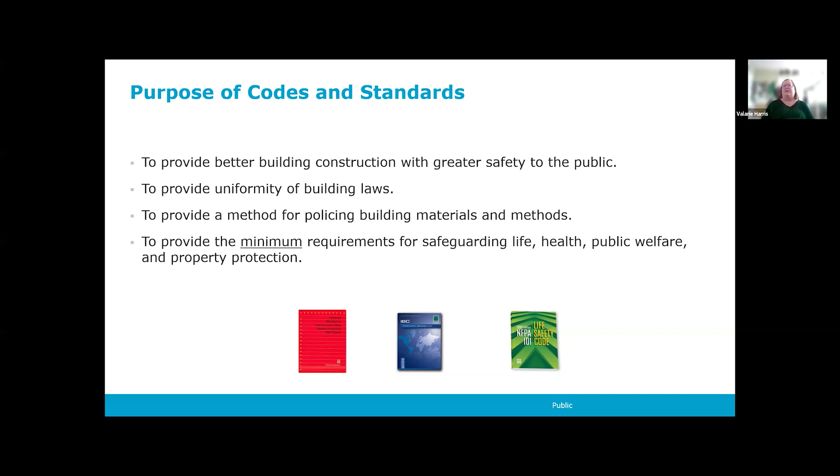There are several codes that affect accessibility. The reason for the codes are to provide better building construction with greater safety to the public, to provide uniformity of building laws, and to provide a method for policing the building materials and methods. It is important to remember that the code is the minimum requirement for safeguarding life, health, public welfare, and property protection. Sometimes it's a pretty low bar, and there are a lot of options that provide greater usability, greater longevity, things like that. So just being code compliant is not necessarily the only criteria you want to think about.

Most of the country uses the International Building Code, IBC, which in accessibility is based around the Department of Justice guidelines and has been codified into the ANSI Standard A117.1. California is kind of the same, but kind of not. This program is designed for a national audience, so we've gone through and put in the California code information as kind of an add-on. It may not be the most graphically exciting way, but sometimes I had to squish to get things in there, so that's why it might not be as graphically pleasing as our marketing department would like.

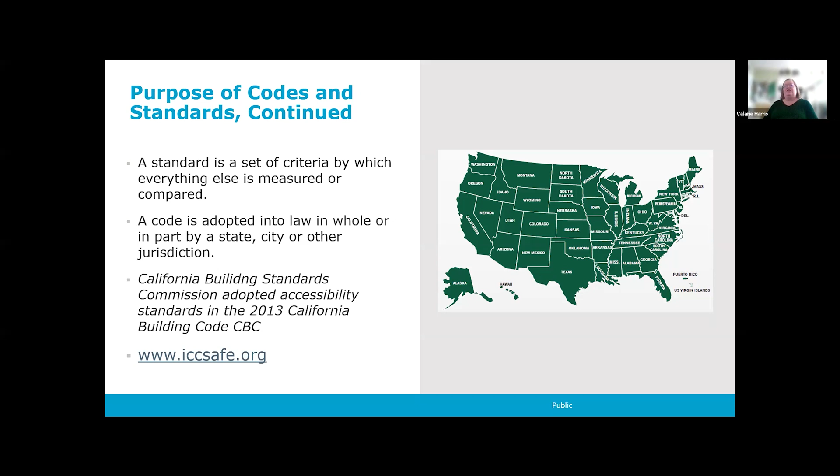A code is adopted into law in whole or in part by a state, city, or other jurisdiction. I have a typo there. California Building Standards Commission adopted the accessibility standards in the 2013 California Building Code, and the different entities like OSHPD, which is now HCAI, and DSA have made some modifications to it as well.

Door hardware is always a balance between life safety and security, and then I think it's a pyramid where we add in accessibility to that as well. So we're always, and those are kind of opposing things, that little teeter-totter there.

Accessibility comes from the American with Disabilities Act. It's an application and there are administrative aspects to it. It covers many more things than doors and hardware, but we'll talk mostly about doors, doorways, and door hardware. And a very important part of that, which is often confusing, is maneuvering clearances, so we'll talk about that quite a bit too. I'm not going to read all the charts and numbers, but we'll talk about what it is and why it matters, and then a little bit about the requirements on door hardware.

The American with Disabilities Act is a civil rights law passed in 1990. It's regulated by the Department of Justice, and Title III applies to public buildings. So what we're talking about here today is mostly found in Title III.

The standard by the International Code Council and ANSI, the American National Standards Institute, is A117.1. The current version is 2017, called Accessible and Usable Buildings and Facilities. It has door and hardware requirements that link up with the IBC more directly than with the CBC, so we'll talk about what some of those differences are.

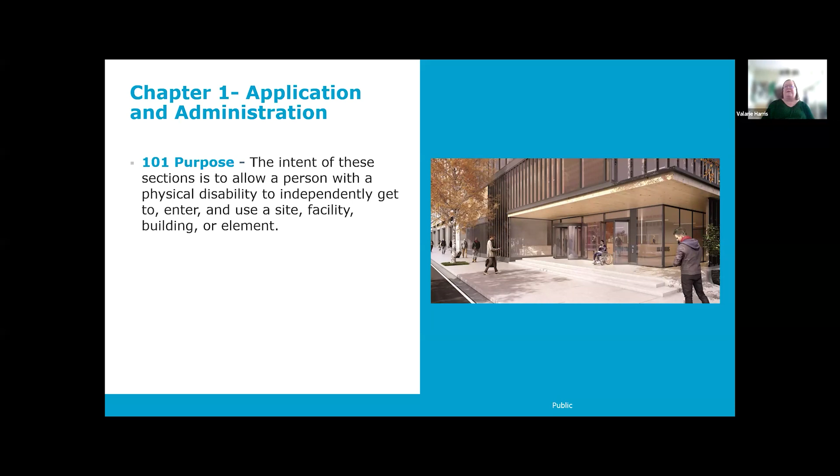The thing that affects doors most often is a physical limitation. My mother had Parkinson's for many years, and getting through doors that did not have good accessibility always ended with me shutting the door, or her getting whacked with the door, which was a bigger problem than me. So there's a lot going on that you have to be aware of. Having traveled a little in other countries, our accessibility here is so much better, and I really missed it when it wasn't here or when I was over there.

Chapter 4 is the main chapter having to do with accessibility, and a little bit about numbering: 11B uses the same numbers as the ANSI standard, while 11A has its own numbering system. So when we get there and talk about differences, I'll have both the 11A and 11B numbering. I probably should have put that on this slide, but I didn't.

The basic thing is that accessible routes shall comply with section 402. An accessible route must have a walking surface with a slope of not steeper than 1 in 20. If it has doors and doorways, they need to be accessible. If there are ramps or curb ramps, there are specific requirements for those, and elevators and platform lifts are all part of an accessible route. So sometimes there are things we can do designing a building which don't allow us to make that an accessible route—we need to be aware of that difference.

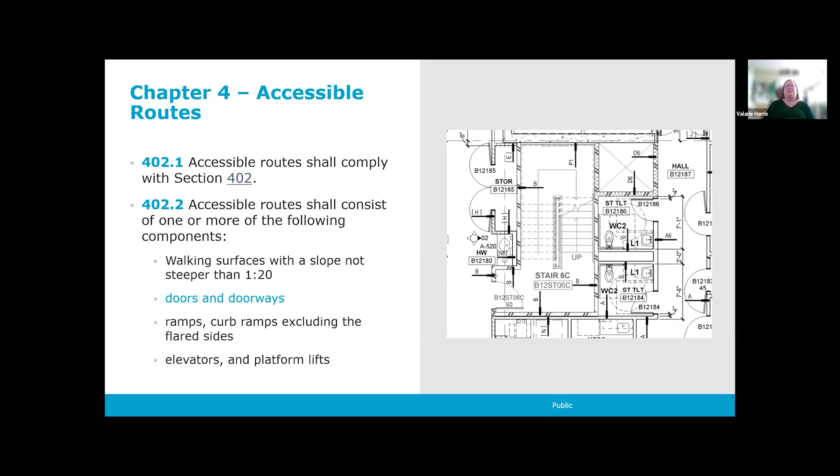And there we go. So there are manual doors and doorways and manual gates, including ticket gates, and they all have to comply with section 404.2. Here's where it shows how that numbering is different. 11B takes the same numbering system, so it's 11B-404.2, whereas in the residential 11A numbering system for CBC, there is its own number, 1126A.1. Generally they say essentially the same things, but we'll talk about them when they're a little different.

It applies to double leaf doors and gates, and on a double leaf, at least one of the leaves must comply with 404.2.2 and 2.3, and 1126A.1. Don't worry about the numbering, we'll just get there and talk about what it takes to comply with those sections.

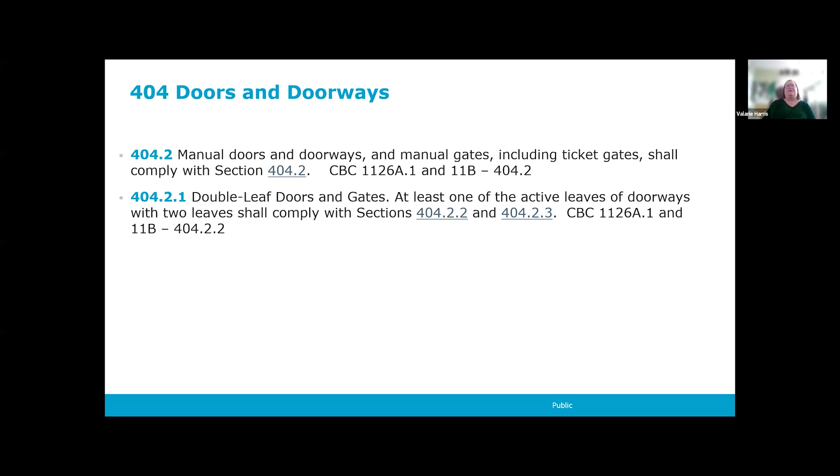And this is it, so this is where it gets a little messy. Sorry about that. So I pulled out what 1126A.1, the residential section, says, and it is a little less extensive than the 11B section, but this will get us started on this discussion. Doorways can be no less than 36 inches wide, not less than 80 inches tall.

And when the door is open 90 degrees, it cannot be less than 32 inches clear to get through that doorway. I have a picture later that shows how that's measured, but that 32 inches clear is what's very important. So if your wall geometry is a little off and you're at 31 and 11/16, that's not 32 inches clear, so that does not comply.

And I have seen where walls have to be moved in order to accommodate that.

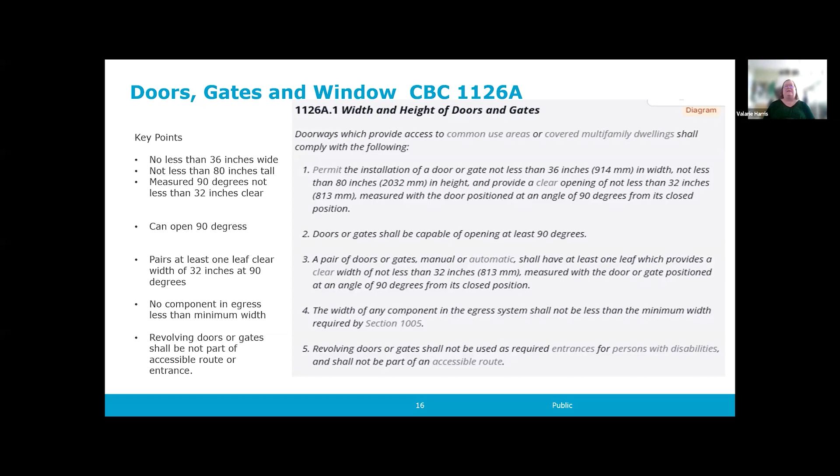Well, this is a big problem because a lot of door levers are like 3 5/8. So you get 2 levers, you get a 1.75 inches thick door, you get a rose, maybe you have a hold open back there, and all of a sudden 7 inches gets pretty tricky. So if you're going into a hospital that had 8-foot corridors, but maybe they're a little wonky there where your door needs to go, and now all of a sudden you don't get your 8-foot corridor.

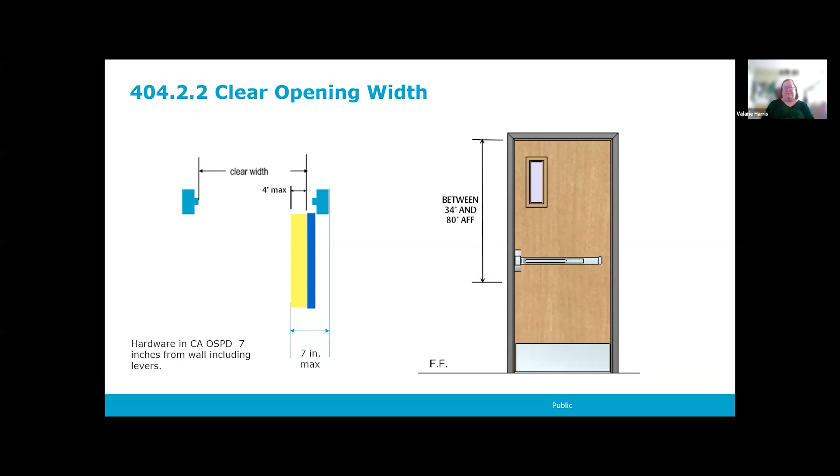Here's a picture of how that clear width is measured. Usually the inspector takes a tape and measures it between the edge of the door and the stop.

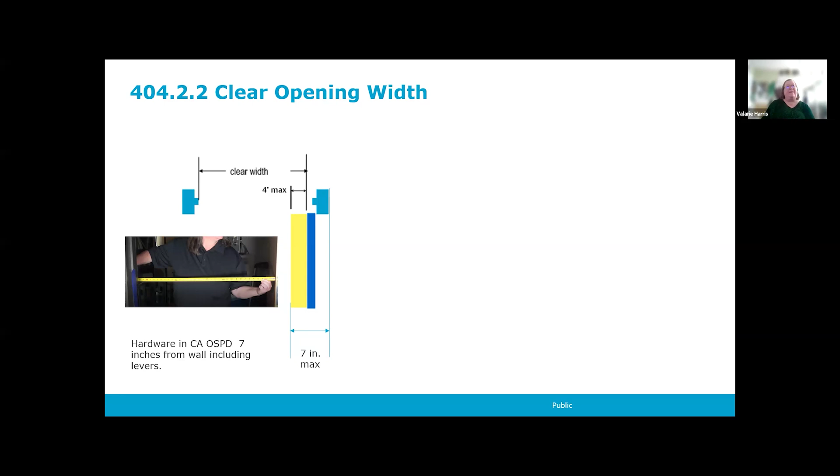So this is the fun and lovely part of accessible doors, maneuvering clearances. These are important so that if someone is using a walker or a wheelchair and doesn't have a lot of upper body strength, they have room to be next to the door, open the door without hitting their wheelchair or walker, and then get through the door.

It matters whether you're approaching the door from the front, and there are diagrams coming up that show this. If you're coming from the hinge side and the door pushes away from you or pulls towards you, or if you're coming from the latch side and the door pushes or pulls away from you, you can look at these maneuvering clearances.

You see they range from 0 inches to 60 inches, so that can greatly affect the design that you have. And those have to be clear—you really shouldn't mount a trash can on the wall in that space.

It also changes if there is a closer on the door, because the closer makes the door harder to open. So they require additional clearances often if there's a closer.

So there is a way around that: if you need the door to close because it's maybe access controlled, or it's a restroom door or something like that, you can always put an automatic opener, and there are less expensive automatic operators designed for this kind of issue. I would not put the cheap, inexpensive auto operator on your main front door, but if you have a public restroom, they're really good for that.

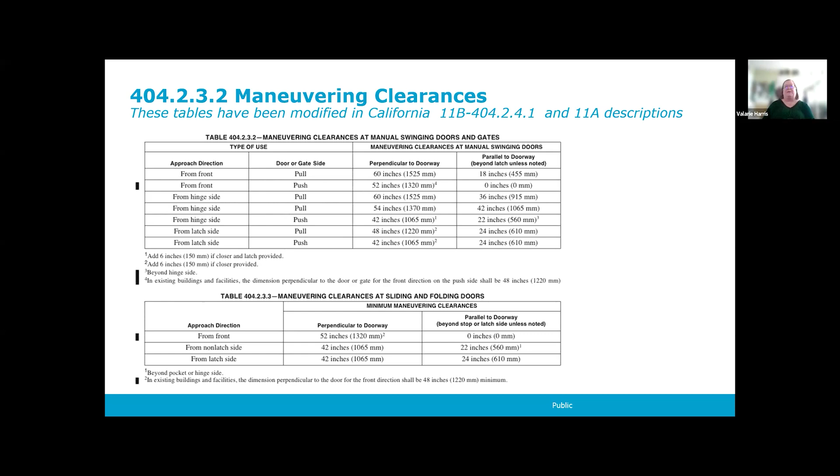So here's some of those pictures I was talking about, which for me makes it easier to understand. These first ones are talking about if you're going to have to roll up to this door, pull it open, back up, and get the door open—you're going to need space, like 60 inches minimum.

You also need a different amount of clearance at exterior doors and interior doors. Not sure why, but you just do. And if you had an automatic door here, you would need a high-low operator, or a high-low actuator, so you would need room for that 36-inch bar.

You can get by with less if you're pushing the door open—you don't have to be able to back up to get the door past your wheelchair, so you need much less space. However, if your dominant hand or your disabled hand is on this side, you need to be able to reach the door and push it open. That's why you need minimum clearance next to the door.

And then if you're approaching from the sides, it makes a difference as well. We won't go through all of these numbers, but just note that there are a lot of different shapes. So if you're in doubt, I'd recommend you go to the code and look up what these requirements are for your specific opening in question.

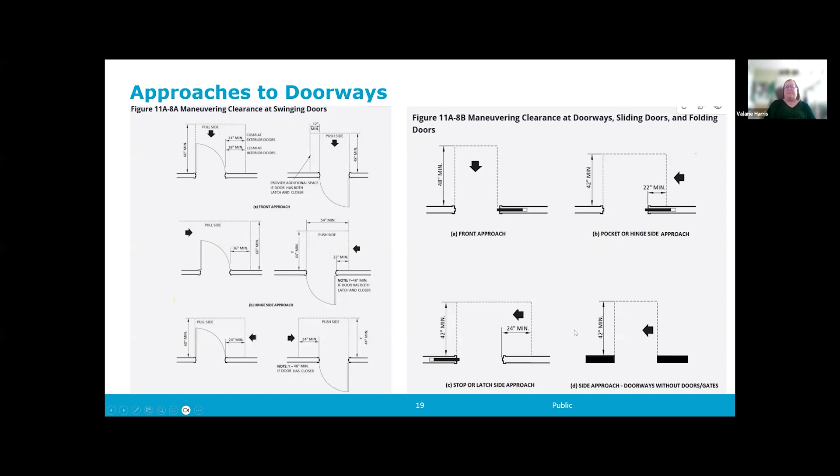So watch that. And if you're coming from the latch side, which in a sliding door means where the door stops, you need a larger clearance. This is what I was talking about with that 1960s architecture.

I once worked on a school project where every door had a piece of structural material. It was a masonry building with decorative masonry on either side of the door, all 200-ish doors. So it created quite a challenge. I think we ended up moving the doors to somewhere else in the wall, but I wasn't necessarily involved in that—I was just looking at it as a problem.

So these kinds of doors require extra space, and you still have to get your 32 inches clear minimum. If the door's recessed part is on the side away from the swing, it's much easier than if it's on the side with the swing.

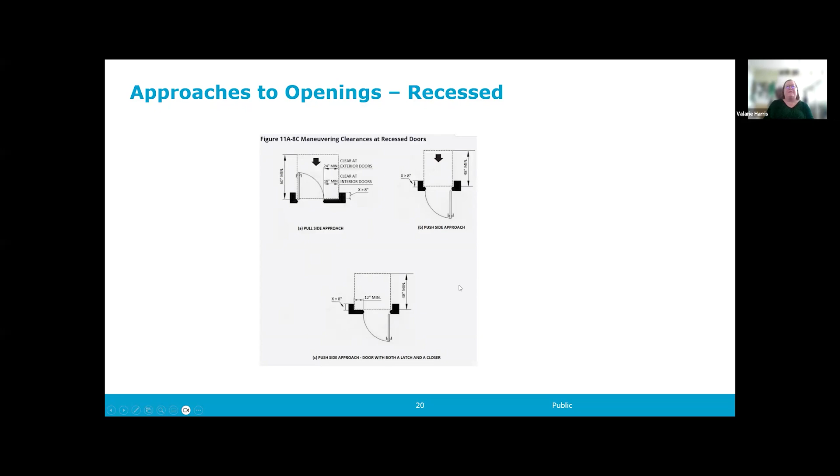If you have vestibules, there are rules for that too—how far apart your doors can be, how much room you need between them, and what your minimum clearances are. It depends on whether the doors both swing in the same direction. If the doors both open out, you have different requirements. If your doors are on adjacent walls, you need additional maneuvering space, and where you measure the 48 inches can be different.

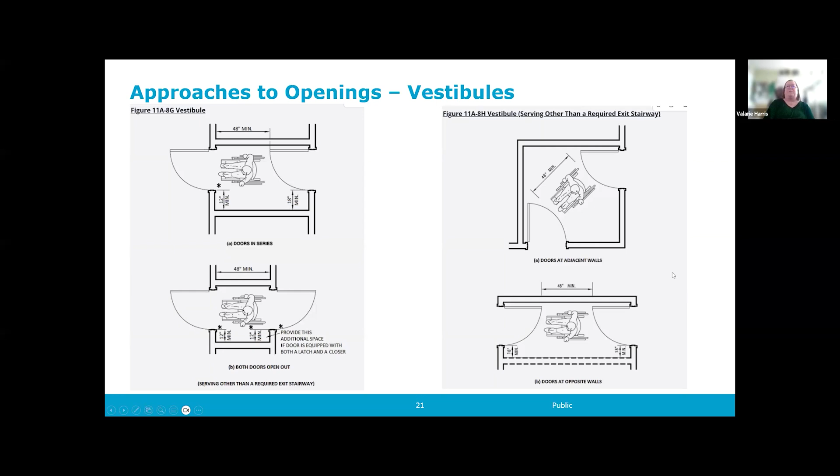And if you have doors on opposite walls, you still have to have your 48 inches between the doors. So now you're getting 36 inches plus 48 inches plus 36 inches—it becomes a pretty big vestibule.

Besides all those numbers and measuring and what has to be clear, there are other requirements too. The floor landing has to be clear and level. You're measuring at right angles to the closed door, and you're measuring the full width of the doorway. There are different clearances on the latch and hinge side, and there might be different clearances based on whether there's a closer on the door.

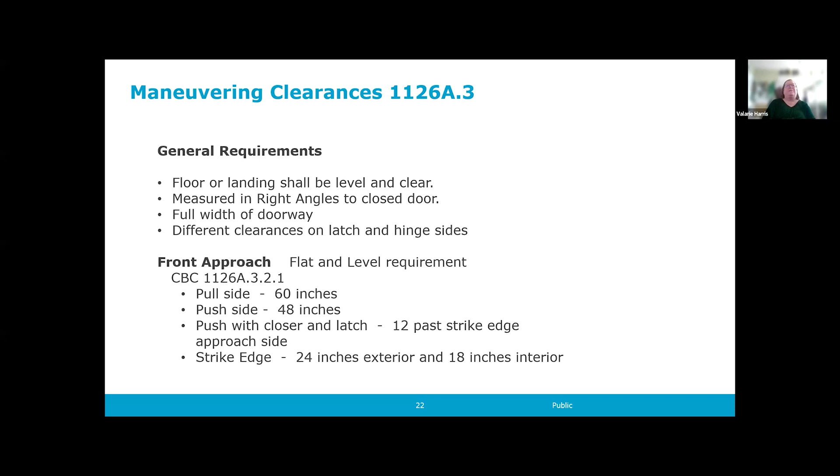We kind of went through this twice already, so I think I'll skip that.

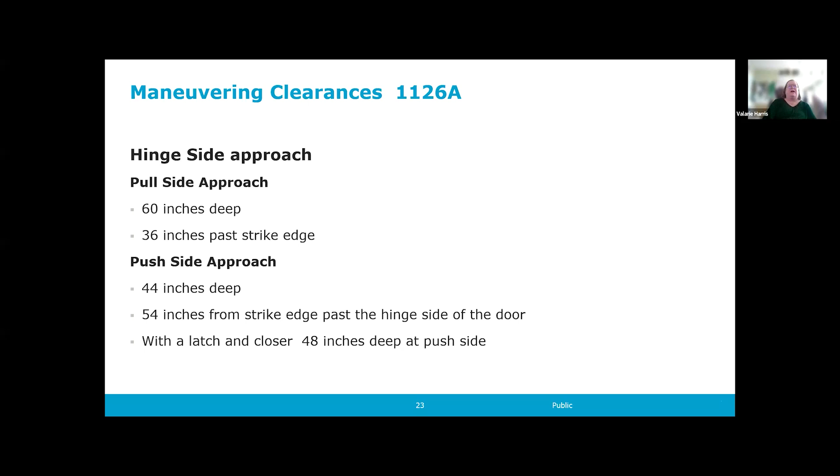These are the general numbers for a front approach, a side approach on the pull side, and a push side approach. And if you're on the latch side, it changes as well.

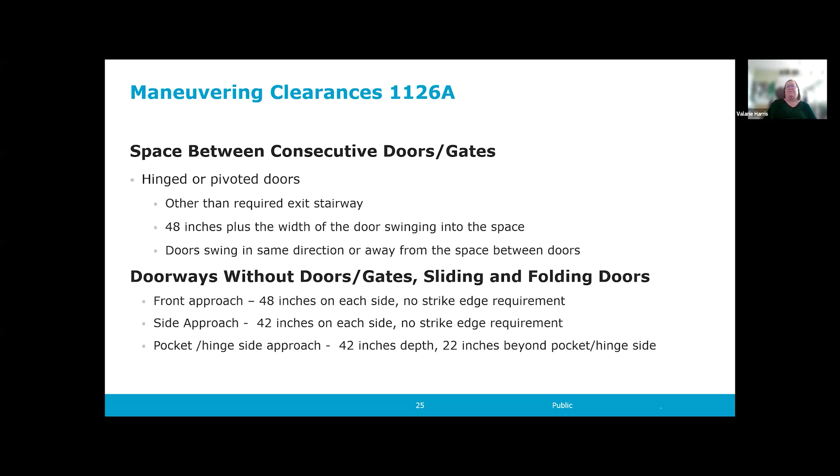A side approach is only 42 inches. And if you have a pocket or hinge side approach on a sliding door, it's 42 inches deep. If you have a pocket where you're insetting the door into the wall, like an alcove, you need about 22 inches beyond the pocket on the hinge side.

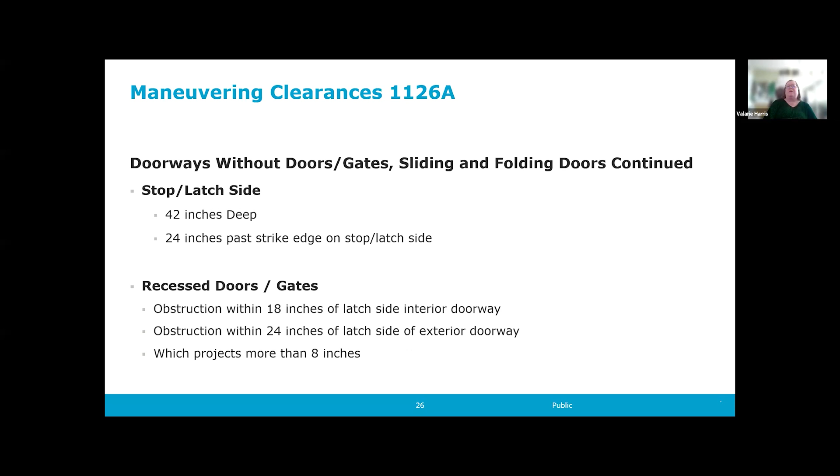And then recessed doors come into play when something projects more than 8 inches. So the next point that causes a lot of consternation is thresholds.

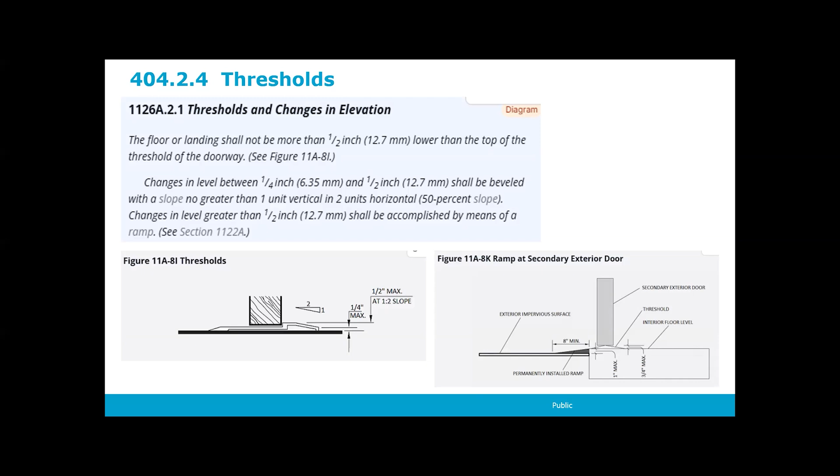Thank you. So we've done the most horrible part of this presentation, all those numbers and dimensions. And the key takeaway for that is just pay attention, because you don't want it to be the inspector who points it out to you that you're not meeting it. So the next subject is thresholds. Thresholds and changes in elevation.

So if you have a floor or landing, you can have an immediate bump up of 1/4 inch, and then you can have a 1 to 2 slope that does another 1/4 inch. So for a total of a 1/2 inch maximum at any accessible doorway. If you have a bigger gap that you need to make up, like the concrete is lower than a 1/2 inch from your floor, then you have to do a ramp. And so, let me look. So the ramp is in section 1122A or in 404.2.4 in 11B. And the slope of the ramp is the same as any other slope.

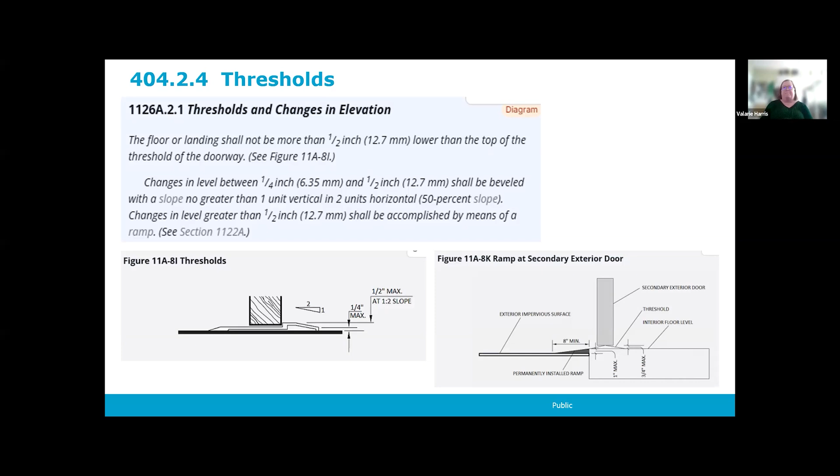So then we get to door hardware. So that's also in section 404. And in 11A, it's in 126A.5 and 10 1008 sections. So California code is a little different in several ways from the International Building Code. We require the hardware to be mounted between 30 and 44 inches. And in IBC, it says unless for security purposes.

However, there are access control products on the door where the top of the card reader is above 48 inches if you have the bottom of the block at 34. So some code officials don't mind that as long as you can get your card read between 34 and 48. And some do mind it. So you have to be careful with that.

And then pools can be, oh, I see I have a typo up here where it says 30 inches. Oh, in California, it's 30 inches to 44. And in the IBC, it's 34 to 48. So you can see how that can create kind of an issue sometimes with hardware that's designed to this standard. Pools have an exception where you can raise the self-latching but not locking pool hardware to a max of 54 inches. You also have to be able to use the hardware without grasping.

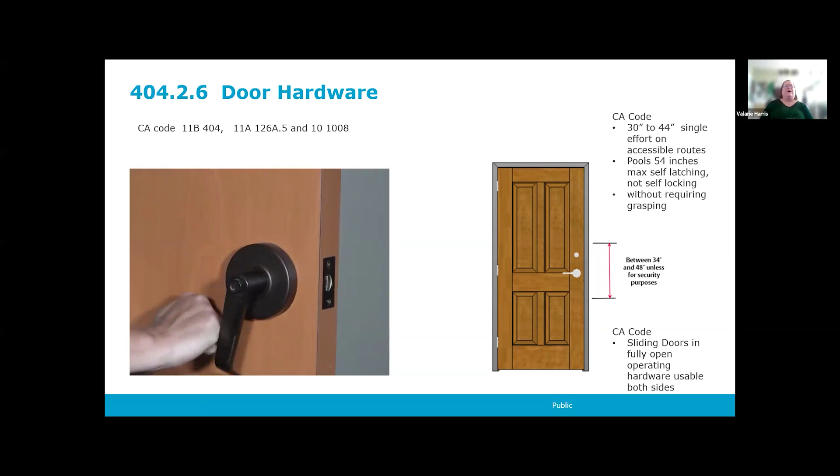So then hardware needs to be a lever with a return in California. In other areas, it does not have to have the return. And you can see they're demonstrating there how someone who has a neurological issue, one of the first things that go is their hands become kind of fist-like and they don't have the finger dexterity. So while most people can grab a lever with their hands, if you have that issue, when you have a return on the lever, it helps your hands stay on the lever.

And then it needs to be a push button to lock the door generally. Little teeny thumb turns aren't good. If you have like an occupancy indicator, there are larger thumb turns that can be done with the side of a fist, and those are acceptable. And in California code, they added that sliding doors must, in fully open positions, be able to operate the hardware on both sides. So that pretty much eliminates flush pulls that go back into the opening or go back behind the door.

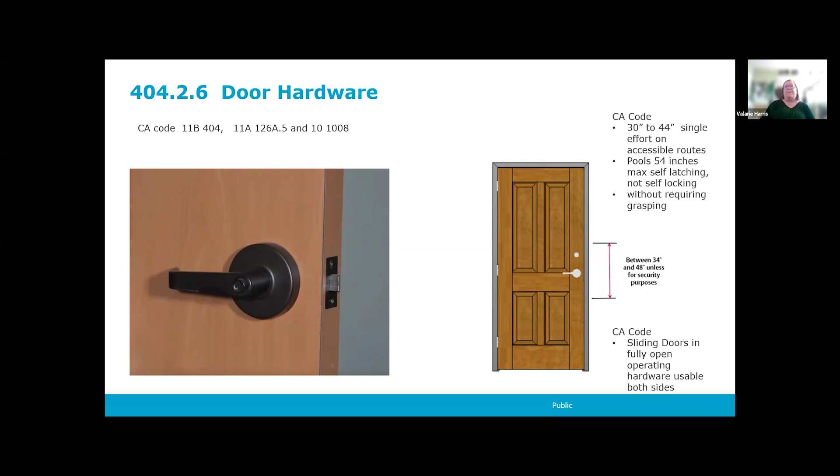Then door closers affect accessibility. So with a door closer, when the door is open 90 degrees, the time required for the door to move to an open position of 12 degrees is 5 seconds minimum. This is a fire life safety requirement, so that in case of a fire, somebody goes through and the door closes again.

In a spring hinge, which is different than a closer, you go from 70 degrees, it has to close in 1.5 seconds minimum. So that's pretty quick, and people can get their fingers shut in that door. I know multifamily uses spring hinges a lot. A problem with spring hinges is they need pretty regular adjustment so that they don't either snap the door closed and hurt people or close slower than the 1.5 seconds.

Stack pressures, either from wind outside or stack pressures within a stairwell. There are cam action closers, which make it easier to get the door to close under the stack pressure and the wind, basically, and to make sure it closes as a fire rated door. So what a cam action closer does is it makes it easier to open the door. So that makes it easier to meet the 5 pound operating and opening force requirements,

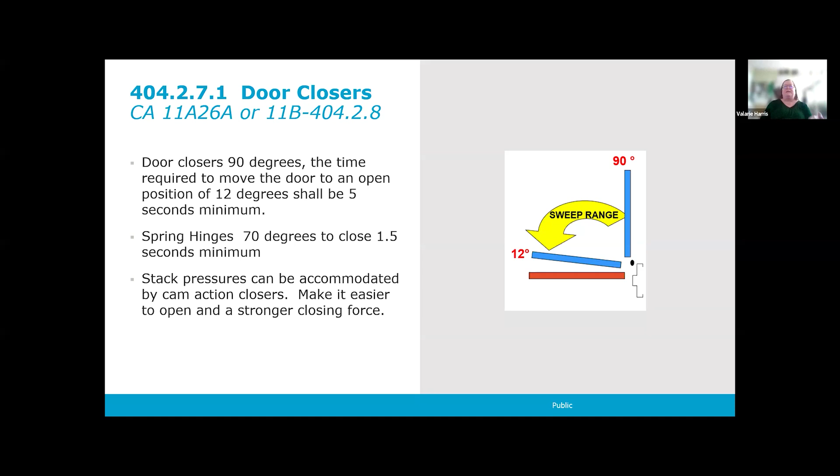but it is stronger to close. So it will close all the way. It produces more force in the closing action than it does in the opening action. So it makes it both easier to open for accessibility and easier to set it so that it'll close every time for fire life safety.

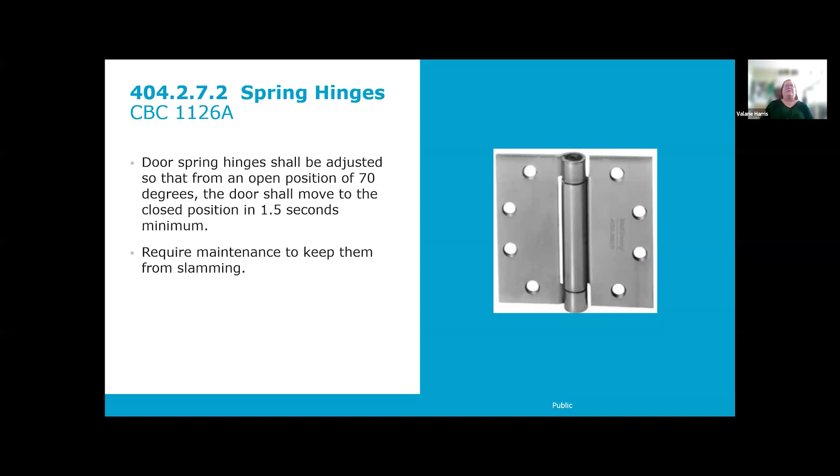And this is what spring hinges look like. And they require maintenance. I doubled up on this slide, sorry. And this is what a closer has, so much adjustability to it. All of these different things are ways it can be adjusted, and major component parts, so that it can be adjusted to meet the opening force requirements.

So an interior hinged door, California A and B require 5 pounds maximum. Sliding or folding doors, 5 pounds maximum. DSA requires 5 pounds maximum on operating and opening forces. So an operating force is like the force it takes to push an exit device bar down or to turn a lever, or however you are operating that door hardware.

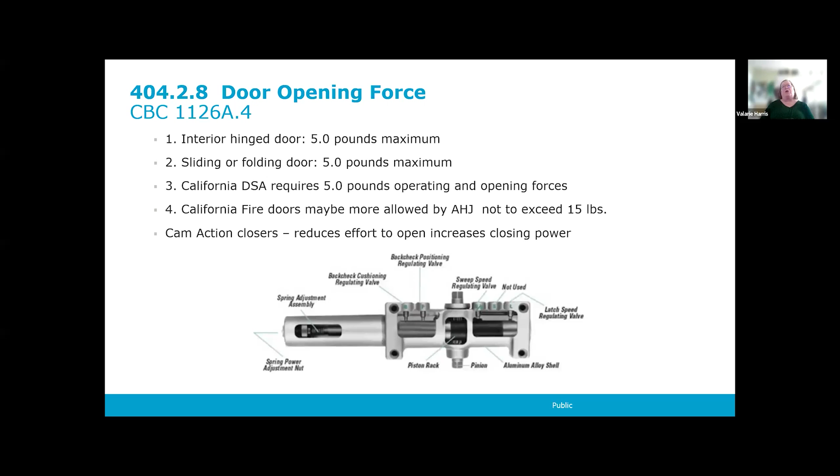And then California fire doors may be allowed by the authority having jurisdiction, usually the fire marshal, to have a little more than 5 pounds maximum, though DSA is the authority having jurisdiction for schools, and they are usually reluctant to make it more than 5 pounds, but other fire authorities can make it more, not to exceed 15 pounds. And then we already talked about cam action closers.

So door surfaces are also regulated. So the bottom 10 inches of the door on all doors, except all glass doors, and a glass door without vertical stiles is what has the exception. That can have a smaller rail that is tapered. And so if you were in a wheelchair, it wouldn't be an impediment because your wheelchair feet could ride along that taper and not get caught.

But if you have the pull here on the push side of the door, it has to be above 10 inches. If your door can be pushed in both directions, they're both push sides of the door. So they both have to have 10 inches clear.

And on a door that has a kick plate, watch out for panhead screws. The manufacturers all provide panhead screws in the packaging with the kick plate, but most door hardware consultants specify countersunk screws in countersunk holes in the kick plate. If you have 30 panhead screws along the top, bottom, and edges of that kick plate, it is not clear. It can be an impediment. So a countersunk screw, of course, fits flush with the kick plate. And then the kick plates should be beveled and free of sharp edges. And they can be no more than 1/16 of an inch thick.

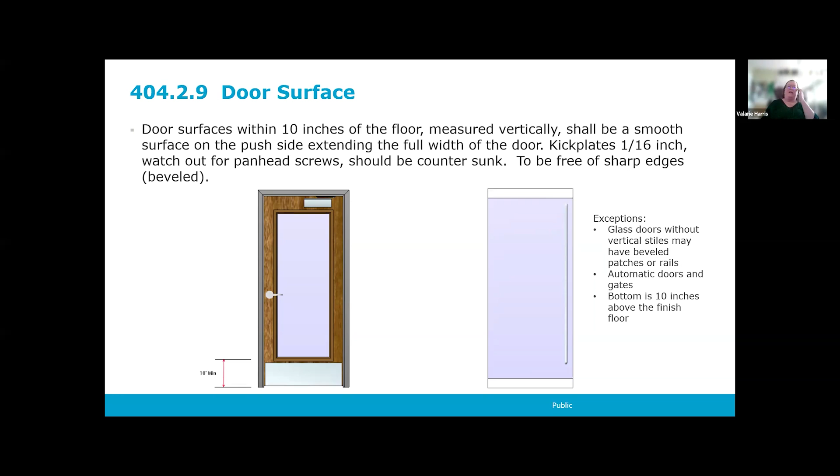Vision lights have some changes as well. The code requires you to either be able to see through the light to see if there's someone on the other side of the door that might be short in stature or in a wheelchair, or it has to be so high that you're not mentally counting on being able to see someone on the other side of the door, so you might be more careful.

So it's 43-inch maximum if you're going to have a light that goes partway down the door, and it's 66 inches or higher if you're going to have a light that's at the top of the door that most people can't see through.

And for door hardware, you want to allow 6 inches between the edge of the door and the edge of the frame around the light, or a side light, so that you can mount the hardware there. If it's less than 6 inches and it has to be 43 inches maximum from the floor, and you have to mount your hardware within 34 inches to 48 inches, you may have to buy a new door if you didn't allow for 6 inches.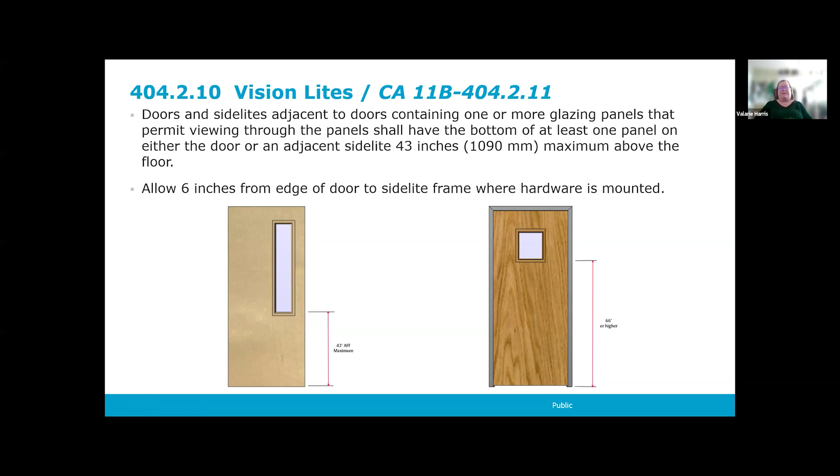Power operated or automatic doors, they have their own section, 404.3. There are 2 types of automatic doors, which confuses people. There's fully automatic doors, which comply with this BHMA standard, which is about 50 pages of test procedures.

And that nowadays is almost always a sliding door, because part of the provisions for safety of a high-speed, fully powered automatic door is that there are 50 inches plus the width of your door of railings required around the door. So some of you are probably old enough to know the old school Targets that had big long railings that you had to walk between for their automatic doors. So now if you need a door that doesn't require a knowing act to open it, like if you walk up to it and it just opens automatically, you're pretty much stuck with having a sliding door.

The other type of power door is a power assist or low energy door, and they also comply with a BHMA standard. It's the A156.19 instead of the A156.10. And that is actually listed in the code, that BHMA standard. And this requires for a safety feature a knowing act to open the door. It's usually a wave to open or a touch actuator.

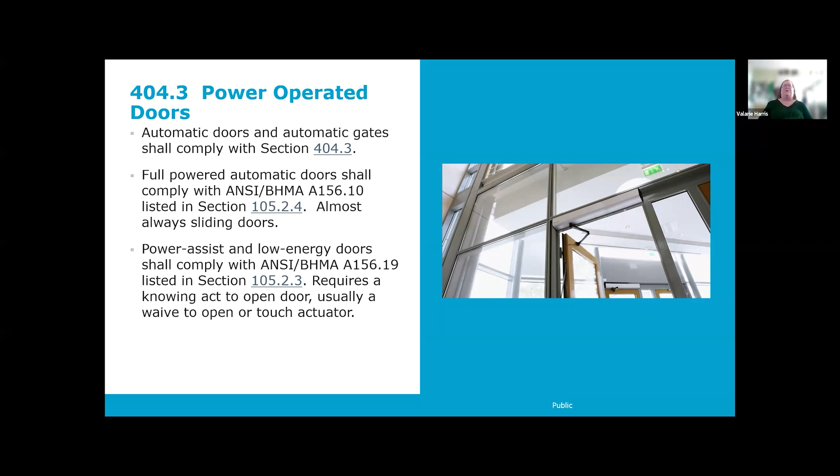And I think, I don't know, we'll probably get to this again too, but in exterior doors in California, not everywhere else, you need to have a high-low actuator, which could either be two square actuators if they're touched, at the height required at the top, and then one at the bottom. Most people prefer the way a 36-inch long bar actuator looks. And for an exterior door, you have to have that kind of actuator on the inside of the door and the exterior of the door.

Automatic doors are really helpful in accessibility where you have a very small maneuvering clearance, or you have something that's in that space that you need to reserve for maneuvering clearances. So if you have an automatic door with a wave operator, you can overcome those clearances, because when you have an automatic door, it assumes you can just wave actuate or push the button to open the door and then go through, and it'll hold you open for a while.

So it can help. I've seen it used a lot when you're retrofitting a restroom and you have enough of the circle clearance and all that stuff, but there's like a sink that's like 2 inches too close to the door. You can put in an operator that's usually around $1,000 or so, and now you don't have to rip the whole bathroom apart and make it bigger.

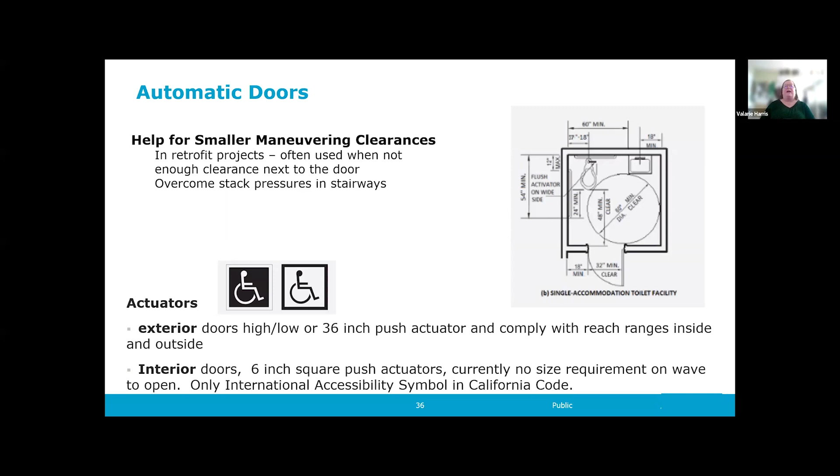Actuators. So here's where the high-low actuators are. So in California, the 6-inch square push actuators with the International Accessibility Symbol are the only ones permitted. In other states, there are other like racing wheelchairs and where you just have words or something like that that are accessible, but not in California. And the wave to open actuators, there's currently no size requirement on those. A touch actuator needs to be 6 inches square. And that's what I have.

Jeff, were there any questions that came up? Or did I just numb everyone with all those numbers? No, I think you did such a fantastic job. They haven't put anything in there.